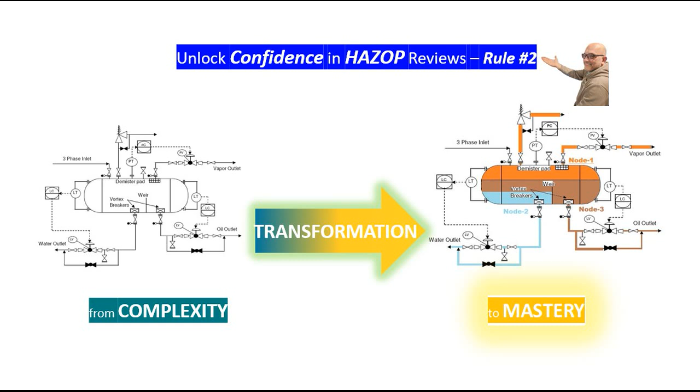As I said, I asked Fred what's going on in the process. You know that we don't just jump into marking nodes, we need to do our own homework. So, what have you done? He explained that he has gone first through the process description document, and he's quite familiar with what's happening in the process.

He even read completely the functional description, as well as the control philosophy and some documents regarding the cause and effects, and how the controls are taking care of the process, and how the safety system potentially trips the system whenever required. Then he started telling me more about the process.

I'm going to explain the same thing for you guys before I jump into explaining rule number two. The process we are looking at is a fractionation column called T101, where a benzene and toluene mixture is introduced from the left hand side through a 3-inch Schedule 40 carbon steel pipe into the fractionation column, where it's separated into two different phases. One phase is more volatile, the benzene side, and the other is the less volatile material, the toluene side. As it passes through the fractionation column T101, it then separates into two different streams.

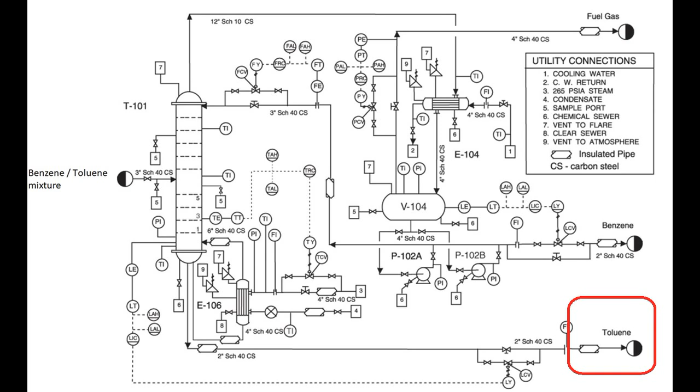One is pure benzene, which goes out from this fractionation column ultimately via a 2-inch Schedule 40 carbon steel pipe, and the other stream is toluene, which is another product being separated by this fractionation column.

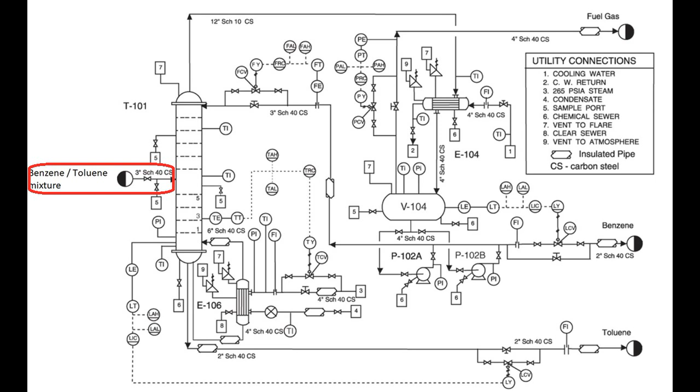The next question I asked him was to walk me through the process and tell me what he understood. He said that on the left hand side a mixture of toluene and benzene are introduced into the fractionation column, or distillation column, T101 or Tower 101. As soon as it enters the distillation column, it's separated into two different phases: one is the liquid and heavier, or less volatile, material, toluene, and the other, benzene, which goes to the top of the column, forming the vapor phase.

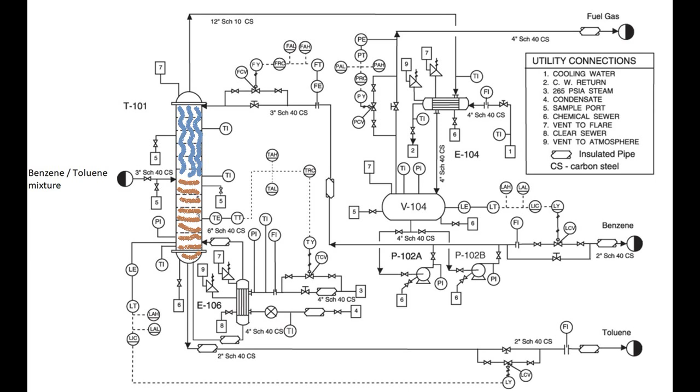The energy required for this process is provided through exchanger 106, a heat exchanger. It's a shell and tube exchanger with medium steam passing through, delivering heat and boiling the mixture of benzene and toluene, then separating them based on their boiling points. So the energy is supplied via this heat exchanger, and this is the driving force behind the whole separation process.

That's the steam line, which I'm showing now on the P&ID. On the same P&ID, the amount of steam or energy required for the separation process is controlled via a temperature control valve, or TCV, which receives a signal from a logic solver, temperature controller, and a couple of elements located in different locations of the fractionation column.

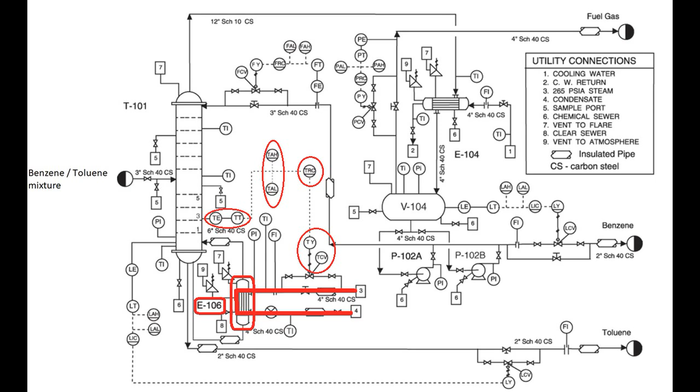Then we go to the top of the column where the more volatile material, which is the benzene, is separated at the top in vapor form, and passes from the top of the column to exchanger 104, which is a condenser.

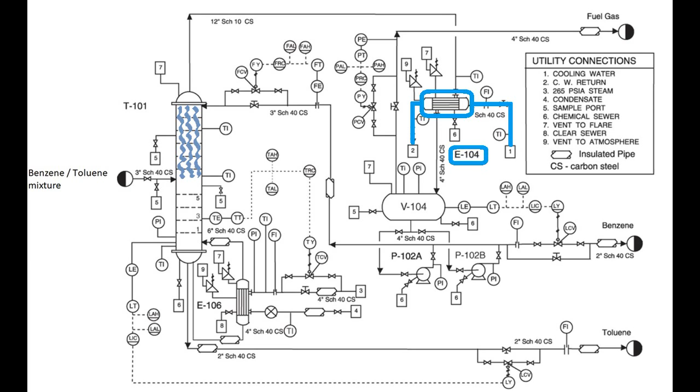This exchanger receives cold water and is condensing vapor benzene into liquid benzene, which ultimately gets collected in V104, which is a vessel. As soon as it gets into the vessel, it separates into two different phases: liquid at the bottom and vapor at the top.

Both of them are benzene, but liquid is at the bottom. The vapors and the lights pass through the top of V104 into the fuel gas stream, and are being burnt there. These are the light materials being separated from the pure benzene, and it could be some vapors from the benzene itself, but in a very low composition.

The whole process here is being controlled by a pressure control valve, which is connected to a pressure element and a logic solver, controlling the back pressure and how much of this gas will go into the fuel gas system.

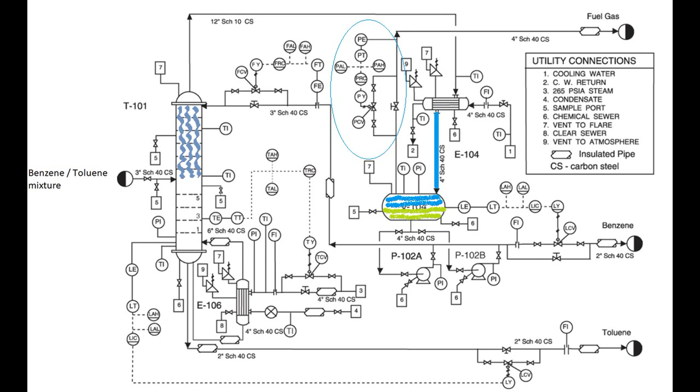And then we've got this midstream or liquid phase, which is at the bottom of the V104. It's pure benzene, and it's being transferred downstream to the storage area via a 2-inch Schedule 40 carbon steel pipe.

As you see, the level of the benzene liquid in V104 is controlled by a level control valve connected to a level transmitter and a level element, all fed into a logic solver and a level controller, which looks into the level of the vessel and lets the streams go into the storage area, controlling it.

The liquid inside V104 is divided into two different streams. One stream goes as a reflux flow back into the fractionation column to improve the quality of the fractionation, and the other part leaves the fractionation section via another stream directly to the storage area.

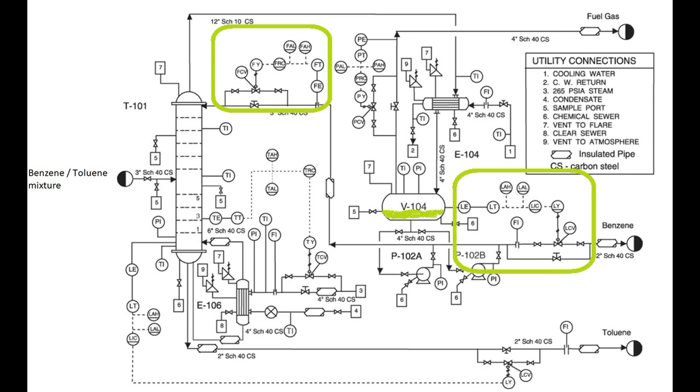The whole process on the liquid benzene side is controlled by a level control valve, and the reflux is controlled by a flow control valve connected to a flow transmitter, a logic solver, and a flow element, which measures the amount of reflux flow required in the column.

Then he started explaining that the liquid side is toluene, which is at the bottom of the column, and it's controlled by the level of the liquid at the bottom of the column. You've got level elements feeding into the level transmitter, into a level indicator and controller, and a logic solver, controlling the level of the liquid via an LCV, a level control valve, and then the toluene is routed out from this P&ID into the storage area.

So basically that was what Fred explained to me regarding the process happening there. As I told you, he's got a 360-degree view, fully confident about the process and the control side, and then he wanted me to help him identify the node.

I noticed that one of the points I could pass him in this short 15-minute consultation is that the liquid side is just, sweet as, just do the node identification as per what we discussed on rule 1. So first I wanted to check how confident he is to mark node 1, which is the bottom of the column, where the toluene is separated and goes out from the right-hand side of the P&ID.

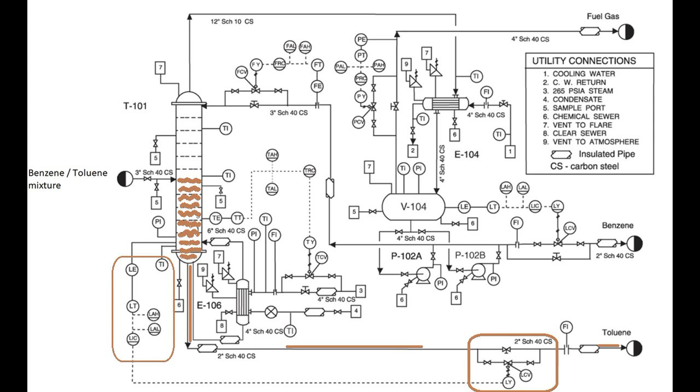He told me that we've got rule number 1, which says every phase change means a new node. Therefore he marked the whole thing, the bottom of the column and the stream routed from that to the end on the right side, as shown here on this P&ID, as node number 1.

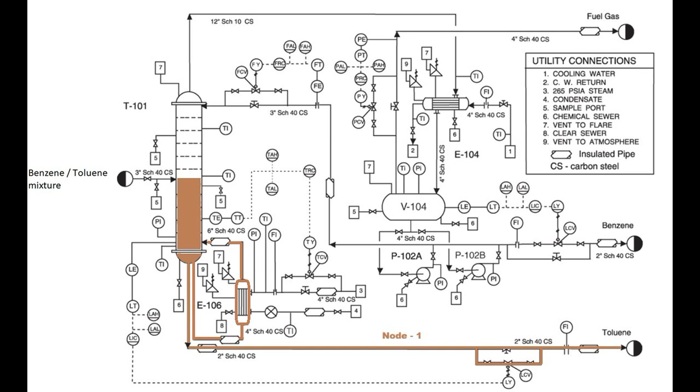And then I brought to his attention that we together are going to go and I'm just going to coach him how to identify node number 2 and node number 3 accordingly. Right.

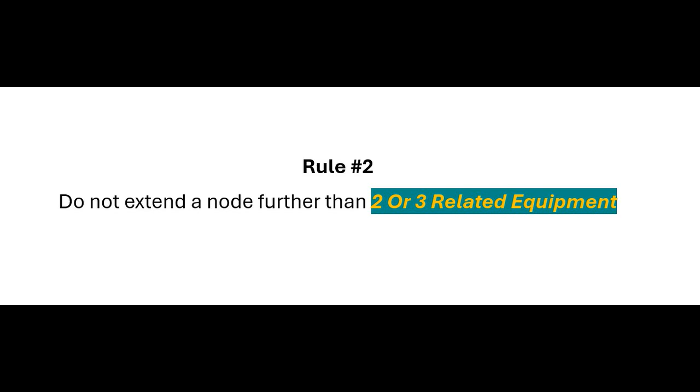At this point, I started introducing rule number 2 to Fred. I told him rule number 2 says do not extend the node further than 2 or 3 related equipment. It sounded a little strange for Fred at the beginning, but I told him to keep that in mind, and we'd go through marking node number 2 so he'd notice it in a better way.

We started node number 2 from the left stream that entered the fractionation column of benzene and toluene, which is separated into two different phases. It was quite easy for Fred to mark the vapor phase on top of the column. The vapor phase got out from the top of the column and went into condenser E104. Using cooling water, as we've discussed before, the temperature of the vapor dropped, and the whole fluid flashed in vessel V104, changing the phase into two different things: one was the liquid phase, and one again was a vapor phase.

Here was the point about rule number two. Fred counted, and it was two equipment down from T101, which was exchanger E104 and V104. I was asking him, should I go further than that? Then he remembered it says 2 or 3. So he thought here we have a reference to rule number 1 as well.

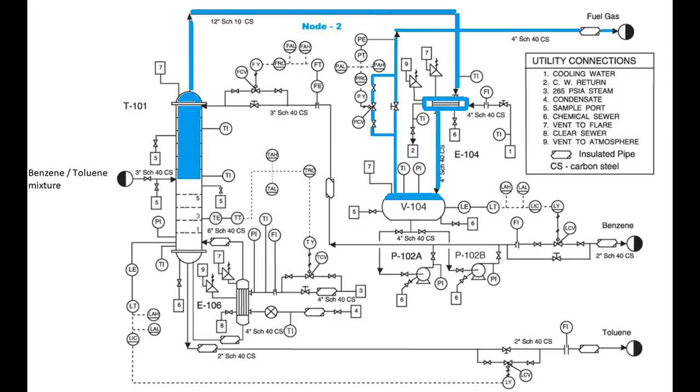Then I asked him, okay, it's time to mark node number 3, and he jumped into doing that in the blink of an eye, because it was easy for him to understand there was rule number 1 about phase change. He noticed that at the bottom of V104 we've got a new phase, the liquid phase, and he marked the bottom of V104 as new node 3. He noticed that the flow coming out from the bottom of V104 splits into two different streams.

One stream goes back as the reflux stream into the top of the column to increase the quality of the distillation, and the whole process on the left hand side, the reflux, is controlled by a flow control valve. He counted, and it was just a single equipment down from that stream, so he was quite comfortable marking that as node number 3.

On the right hand side, he noticed that the majority of that liquid phase is actually being pumped to the storage area of benzene, on the right hand side of V104 as we're looking at the P&ID. He marked that as node number 3 as well, noticing that line has not more than 2 equipment, considering pumps, which should also be considered on the left hand side. So there are not more than 2 equipment on each of these streams, and it can be counted, and rule number 2 is still valid.

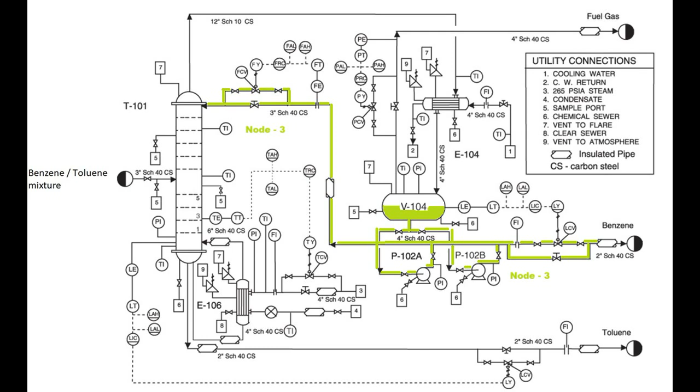So considering rule number 1 and rule number 2, and the coaching I provided for Fred, I believe he's done a very good job marking all 3 nodes.

And as always, we have an exercise, so I want you to work it out: what would be the problems if we extend the node further than 2 or 3 equipment? And if a node includes more than 2 or 3 equipment, what could possibly go wrong while we are doing the HAZOP? Put that as part of your comments, and we'll discuss it all together. Thank you.